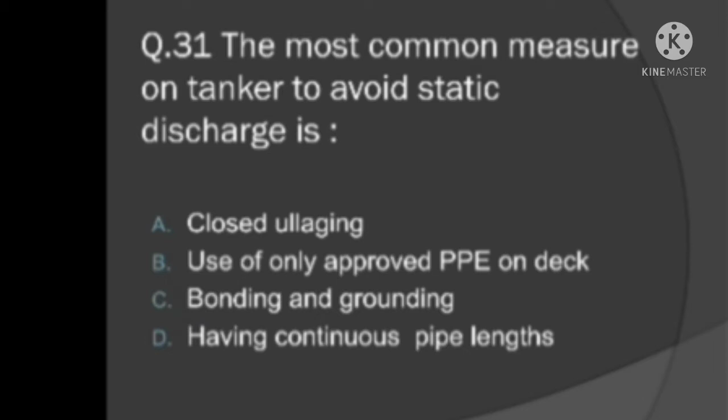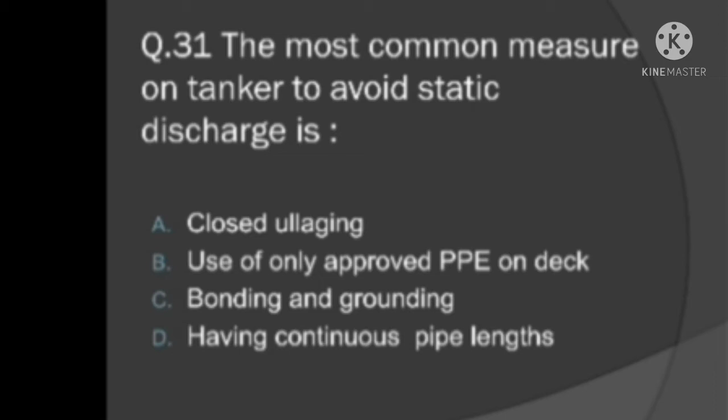The most common measure on tankers to avoid static discharge is option A closed ullaging, option B use of only approved PPE on deck, option C bonding and grounding, option D having continuous pipe lengths. The correct answer is option C, bonding and grounding.

Systemic poisons are those that cause an adverse health effect. Option A to the whole body, option B to several organs of the human body, option C to the skin only, and option D on a specific organ. The correct answer is option D, on a specific organ.

When inhibited chemical cargo is loaded, the shipper should provide option A sample of inhibitor to chief officer, option B MSDS for added inhibitor, and option C inhibitor certificate for the valid voyage. The correct answer is option C, inhibitor certificate for the valid voyage.

In chemical tankers with common pipeline, cargo segregation is done by option A isolating tanks after completion of loading, option B close all valves for tanks after completion of loading, option C inserting blind flanges in pipes concerned. The correct answer is option C, inserting blind flanges in pipes concerned.

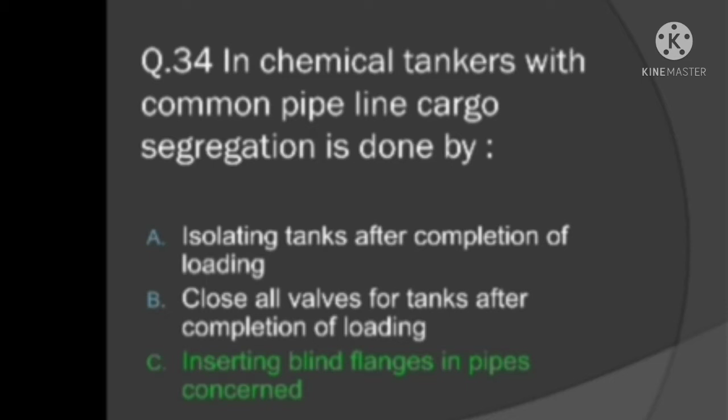H2S is option A less toxic, option B inflammable, option C toxic, corrosive and flammable. The correct answer is option C, toxic, corrosive and flammable.

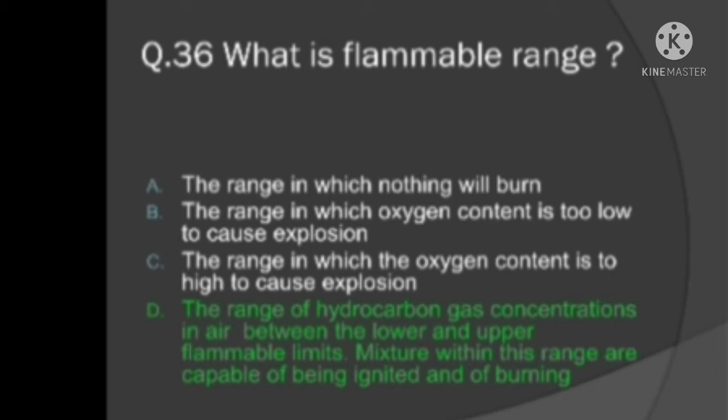What is flammable range? Option A the range in which nothing will burn, option B the range in which oxygen content is too low to cause explosion, option C the range in which the oxygen content is too high to cause explosion, and option D the range of hydrocarbon gas concentrations in air between the lower and upper flammable limits. Mixtures within this range are capable of being ignited and of burning. The correct answer is option D, the range of hydrocarbon gas concentrations in air between the lower and upper flammable limits. Mixtures within this range are capable of being ignited and of burning.

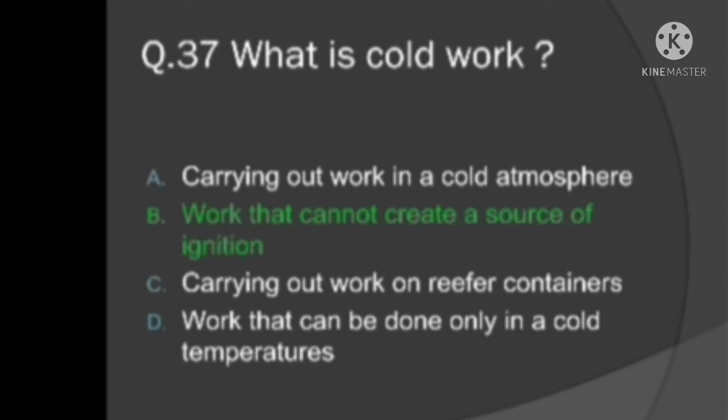What is cold work? Option A carrying out work in a cold atmosphere, option B work that cannot create a source of ignition, option C carrying out work on reefer containers, and option D work that can be done only in a cold temperature. The correct answer is option B, work that cannot create a source of ignition.

What is an inert condition? Option A when the oxygen has been eliminated from a tank, option B when the oxygen is less than 10% by volume in a tank, option C conditions in which the oxygen content throughout the atmosphere of a tank has been reduced to 8% or lower by volume by the addition of inert gas, option D when the oxygen is 21% by volume in a tank. The correct answer is option C, conditions in which the oxygen content throughout the atmosphere of a tank has been reduced to 8% or lower by volume by the addition of inert gas.

What are closed operations? Option A ballasting, loading or discharging operation carried out without opening ullage ports, option B to prevent escape of hazardous vapors from tanks, option C remote control of tank's delivery valves, and option D remote control of inert gas entry into a tank. The correct answer is option A, ballasting, loading or discharging operation carried out without opening ullage ports.

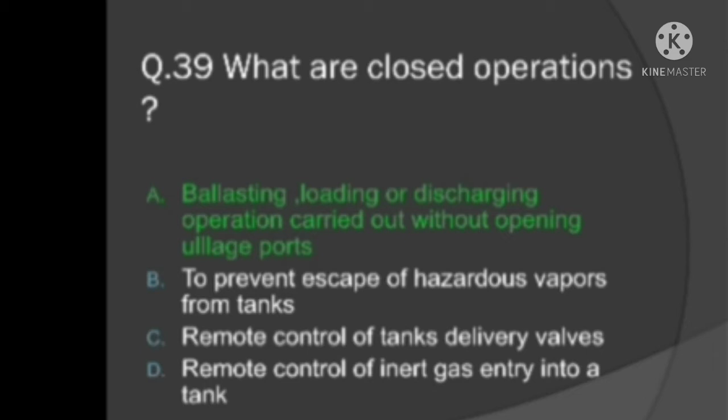The ISM code requires work procedures which ensure dash performance. Option A superior, option B profitable, option C safe, and option D excellent. The correct answer is option C, safe.

A man has suffered a burn on the arm. There is reddening of the skin but no other apparent damage. Using standard medical terminology, this is option A minor burn, option B superficial burn, option C extremity burn, and option D first degree burn. The correct answer is option D, first degree burn.

The change in resistance of a hot filament in a tank scope is displayed as option A percent volume of oxygen, option B percent volume of inert gas, and option C percent volume of hydrocarbon. The correct answer is option C, percent volume of hydrocarbon.

The Draeger tube system is used for option A ammonia gas detection, option B nitrogen gas detection, option C multi gas detection. The correct answer is option C, multi gas detection.

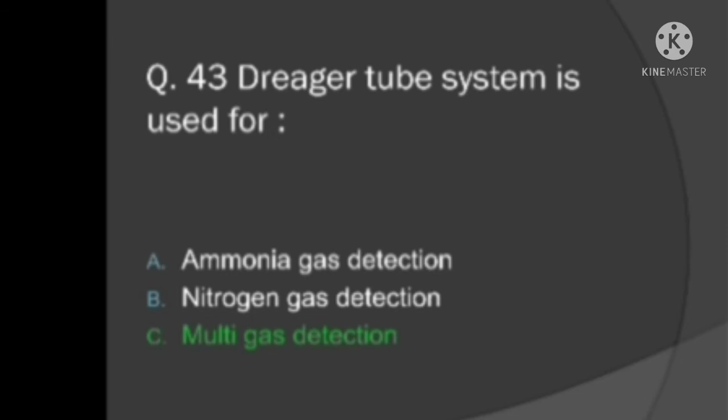The electrostatic field strength which is sufficient to cause breakdown of air or petroleum gases is about option A 5000 kilovolts per meter, option B 3000 kilovolts per meter, option C 3000 watts per meter, and option D 5000 volts per meter. The correct answer is option B, 3000 kilovolts per meter.

What are all the three basic stages which lead to a potential static hazard and are necessary for an electrostatic ignition? Option A viscosity, charge separation and temperatures. Option B charge accumulation, velocity and density. Option C charge separation, charge accumulation and electrostatic discharge. And option D flammable gas, air and heat source.

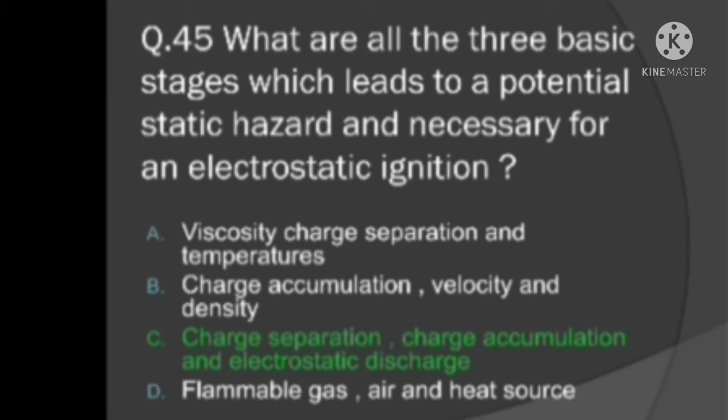The correct answer is option C, charge separation, charge accumulation and electrostatic discharge.

A crew member suffering from hypothermia should be given: option A, a small dose of alcohol; option B, treatment for shock; option C, a large meal; or option D, a brisk rub down. The correct answer is option B, treatment for shock.

Which hand gloves are best suited for handling solvents, petrol, oils and many chemicals? Option A, PVC gloves; option B, rubber gloves; option C, neoprene or nitrile rubber gloves. The correct answer is option C, neoprene or nitrile rubber gloves.

Heavy fuel oil when spilled are: option A, more harmful to sea life than lighter oils; option B, easier to clean up than lighter refined oils; option C, less harmful to sea life than lighter oils; and option D, not a real threat to marine life. The correct answer is option C, less harmful to sea life than lighter oils.

You are operating a non-ocean going vessel. How much of the accumulated oily waste must you be able to retain onboard? Option A, 25%; option B, 50%; option C, 75%; and option D, 100%. The correct answer is option D, 100%.

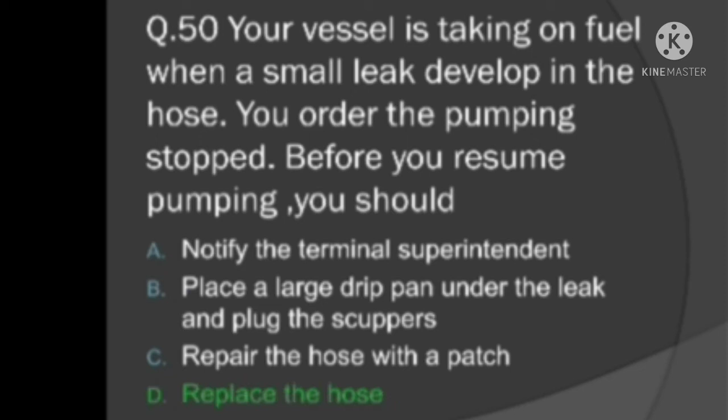Your vessel is taking on fuel when a small leak develops in the hose. You order the pumping stopped. Before you resume pumping, you should: option A, notify the terminal superintendent; option B, place a large drip pan under the leak and plug the scuppers; option C, repair the hose with a patch; option D, replace the hose. The correct answer is option D, replace the hose.

In the displacement method of purging and inerting, the inert gas: option A, enters from the top of the tanks; option B, enters from the bottom of the tanks; option C, mixes with the original tank atmosphere; and option D, could enter from the bottom or the top of the tanks. The correct answer is option A, enters from the top of the tanks.

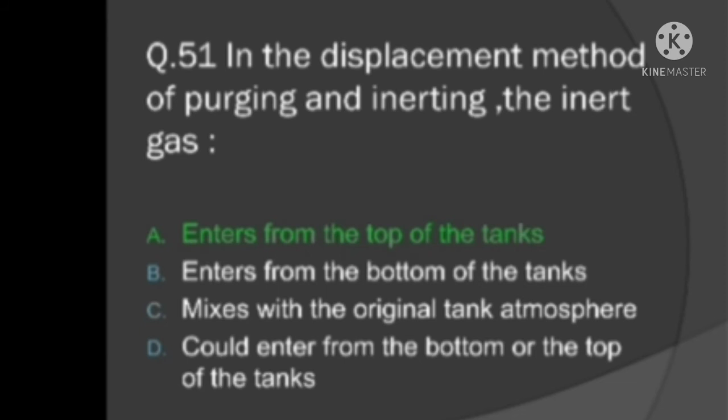A gas venting system on a tanker that has a gas line in each tank connected to a common gas main running the full length of the ship is called: option A, gas main system; option B, a common main system; option C, a vent main system; and option D, an independent system. The correct answer is option B, a common main system.

Submersible pumps found in chemical tankers are normally made of: option A, aluminium alloy; option B, fiber; option C, stainless steel; and option D, nickel alloy. The correct answer is option C, stainless steel.

What do you understand from the term bleed off COW? Option A, the process of pressure testing the cow line on board. Option B, the process of diverting part of cargo discharged for reducing rate. Option C, the process of diverting part of cargo discharged for crude oil washing. Option D, the process of draining oil from the cow lines after washing. The correct answer is option C, the process of diverting part of cargo discharged for crude oil washing.

Category Z noxious liquid substances from tank cleaning are deemed to present a hazard. Find the correct statement. Option A, justify the prohibition of discharge into the marine environment. Option B, justify the limitation on the quantity of discharge into the marine environment. Option C, justify less stringent restriction of discharge into the marine environment. The correct answer is option C, justify less stringent restriction of discharge into the marine environment.

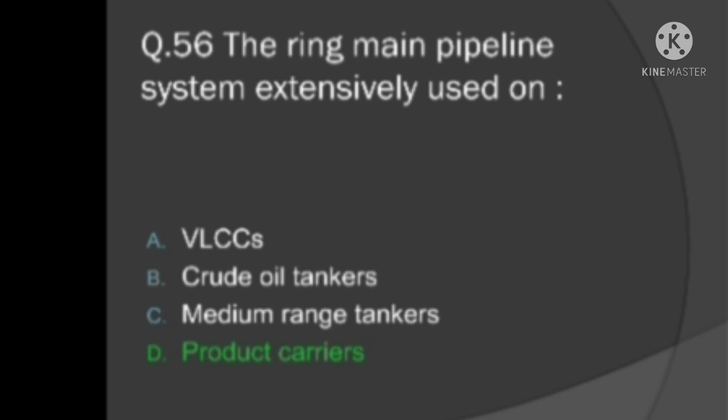An inert gas generator burns what oil to generate inert gas? Option A, crude oil; option B, heavy oil; option C, diesel oil; and option D, gas oil. The correct answer is option D, gas oil.

The stretcher for emergency rescue from the pump room should be: option A, available close to the pump room; option B, kept permanently rigged for hoisting an injured person; option C, kept in ship's hospital and clearly marked. The correct answer is option B, kept permanently rigged for hoisting an injured person.

What is the safety margin of tank volume when calculating the filling ratio of a cargo which needs heating during its carriage? Option A, 5% of tank capacity; option B, 2% of tank capacity; option C, 10% of tank capacity; and option D, 1% of tank capacity. The correct answer is option B, 2% of tank capacity.

Of the hydrocarbons found in nature, which is the lighter fraction of hydrocarbon which can be free or dissolved? Option A, crude oil; option B, asphalt; option C, refined oil; and option D, natural gas. The correct answer is option D, natural gas.